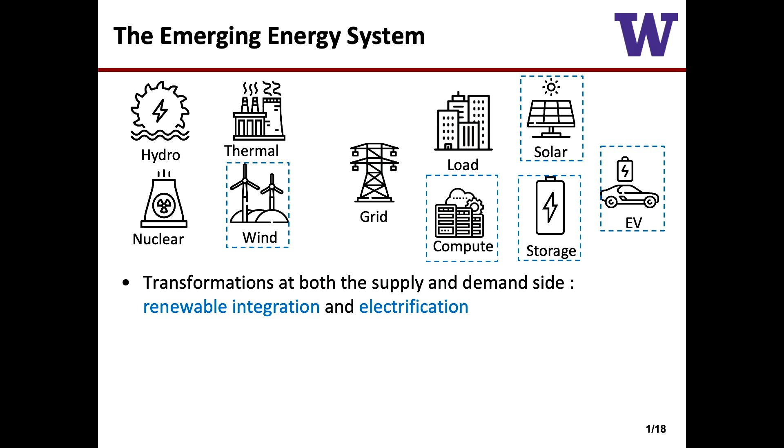So this will be a more technical talk looking at the energy system and AI, how they influence each other. As was said, if you look at the power system, it's quite an interesting time in power systems. The system was relatively stable for 40 years. In the last 20 years, it suddenly started to change very fast. We're at a case where both the demand side and the supply side are changing. The supply is starting to be uncertain with renewables, and demand is really starting to pick up. So it's an interesting time to work in this area.

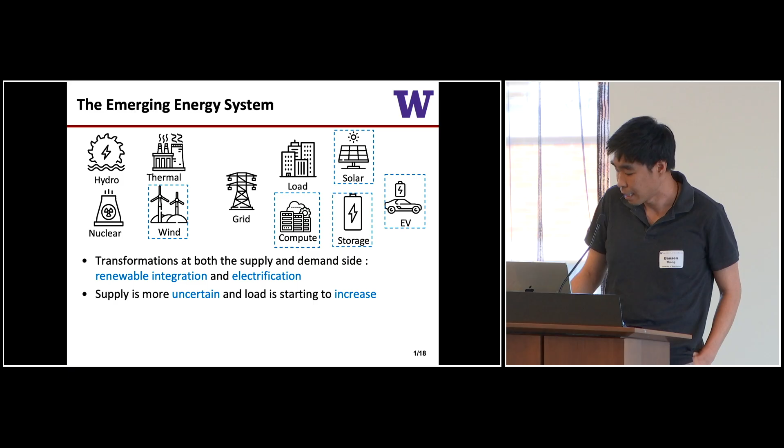If you look at the opportunities and challenges in the area, the power system is a system where building big things tends to be challenging. As we heard, we're getting better at building plants, but building things like transmission lines still takes years and years. But the things around the grid, from data to control to smaller generation, all of these things around the edge, we can do very fast, on the scale of months instead of decades or years. And with data, of course, comes a lot of excitement about using AI and ML. How do we use this data? What can we do with this?

And power system is a case where you don't get to try things out, right? You fail once, they'll never talk to you again. So you have to make sure of anything you do; you don't get to say, let me try this 10,000 times and I'll get better. You cannot fail. And now things are starting to interact. Three or four years ago it was, how do we use AI to improve the power system? Now AI is one thing power system engineers think a lot about, just to power the AI that's coming in.

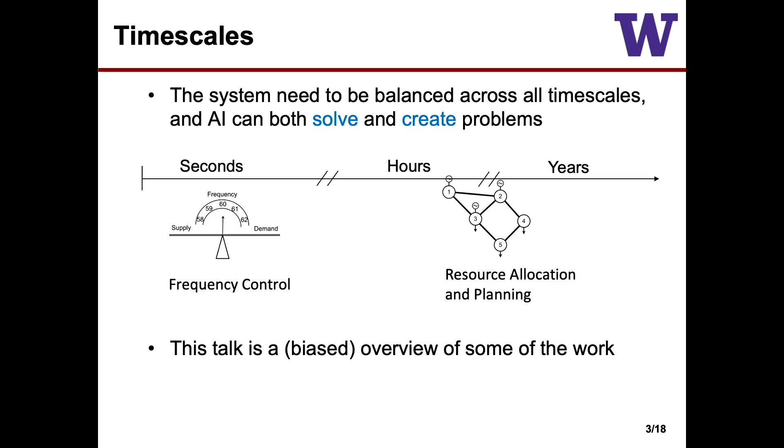One thing to remember for a power system is we have to balance the system at all time scales. Supply has to equal demand every second, every minute, every hour, every day, every year, every decade, and so on. And AI does help us solve some hard problems and also creates challenges along all those time scales. So I'll give you 2 examples, one at a very fast time scale and one at a much longer time scale, of how AI can help us solve some very hard open problems and what new challenges it creates for us.

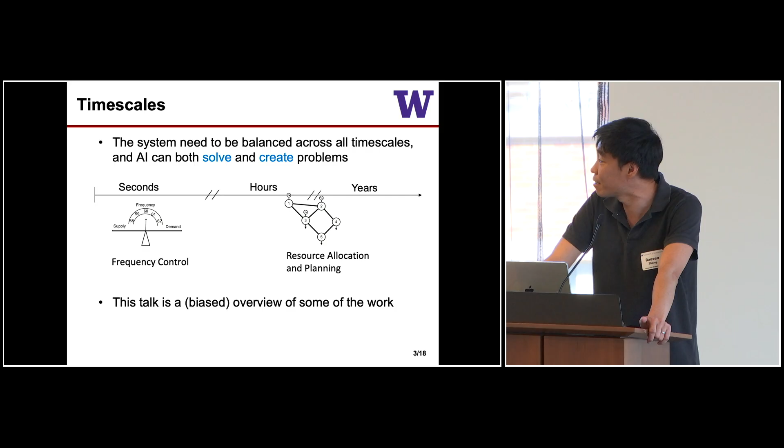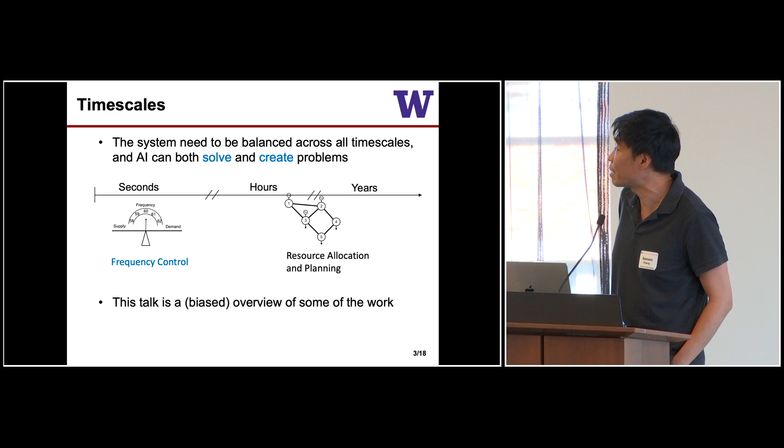This is an admittedly very biased overview. There's a lot more going on than what I'm presenting; these are just a couple of examples of things we have done. So let's look first at the fast time scale, at frequency control. Think about the power grid as a very large network system; it's thought of as the most complicated engineering system ever built. And the question is, why do lights stay on? It's a surprisingly non-trivial thing to answer.

Because disturbances in the system happen all the time. You can flip a switch, plug something into the outlet, turn off a light, and so on. You don't tell the generator, I'm going to use more energy. There's no explicit communication. How does the generator know? I'm a hydro generator 1,000 miles away; how do I know what's going on? Yet power stays on most of the time. Things are balanced. This happens by a mechanism called frequency control. I want to explain this a little, then tell you how renewables are changing this and what AI can do to help us.

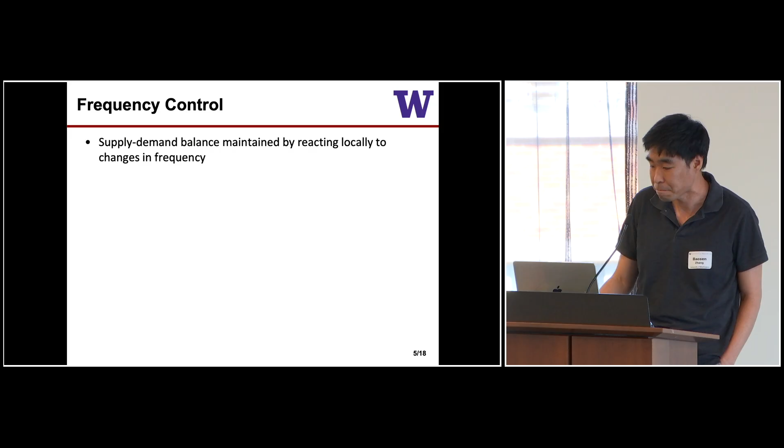So supply and demand is basically maintained by just reacting locally to a thing called frequency. If your supply and demand is balanced, in the US our grid runs at 60 hertz. It's a constant frequency. If you plug something in, demand goes up, and then frequency goes down. So you're borrowing this rotation inertia in the big generators. You're borrowing this power out of it, so they spin a little bit slower, and then this power goes for

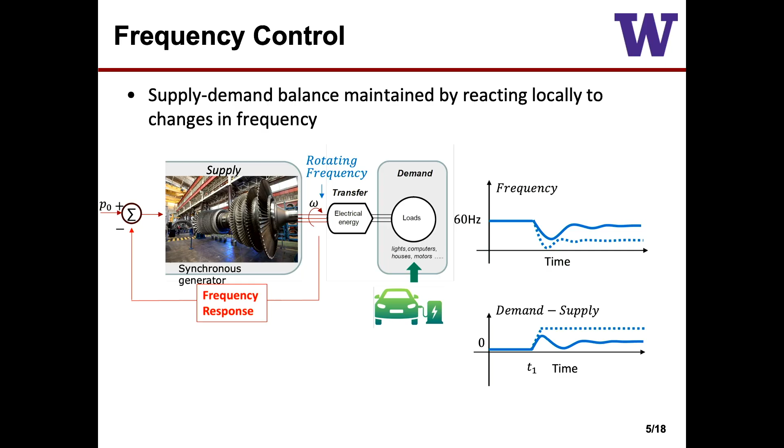the demand. Then your generator observes this, and you're supposed to do feedback control, and you can recover your frequency. And this number tells us basically the health of the grid, a single metric that tells the balance. And if you have big generators, they sort of do this linear response. This is determined by the physics of machines. They just rotate this way.

The question now comes, what if I replace all these big synchronous generators with power electronics? Most renewables connect to the grid through power electronics. These are digitally switched circuits. They have no physically moving part at all. So they don't need to do this response. They have no natural response to this.

And then somebody mentioned FERC. What FERC does is tell you, well, you have to do something, otherwise the grid falls apart. FERC doesn't tell you what to do. It just says, I require you to do things so the grid is stable. So what should you do? Well, one thing you can do is try to act like a generator. That turns out to be not a very good strategy.

If you think about it, a big synchronous generator is the size of this room, and your inverters are this big. So if you try to be a synchronous generator, you're not a very good synchronous generator. So you should do something else. But this is actually a very hard technical question. We don't know what to do. We don't know how to solve this problem.

So the obvious answer now is, let's use AI for this. I don't know what to do, right? I'm just putting in a neural network, and hopefully it does something reasonable for me. And this is not very hard to train. Your goal is basically to optimize how large the oscillations are in the grid. You put this into a training environment and look at how to minimize this thing. It takes you about a few hours to code this up.

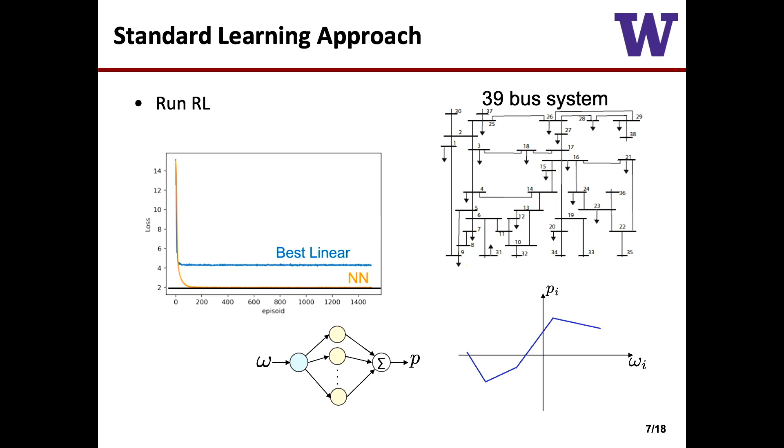The trouble comes if you do this directly and put it into a grid. Let's say you actually put it in and simulate it, what happens? It will actually blow up your grid. Training looks very nice, but in practice you will have an unstable grid. So the challenge of using AI for energy system control especially is you need to make sure there are constraints you include when you use these kinds of tools. There's a stability constraint, not just cost. The grid should be stable all the time.

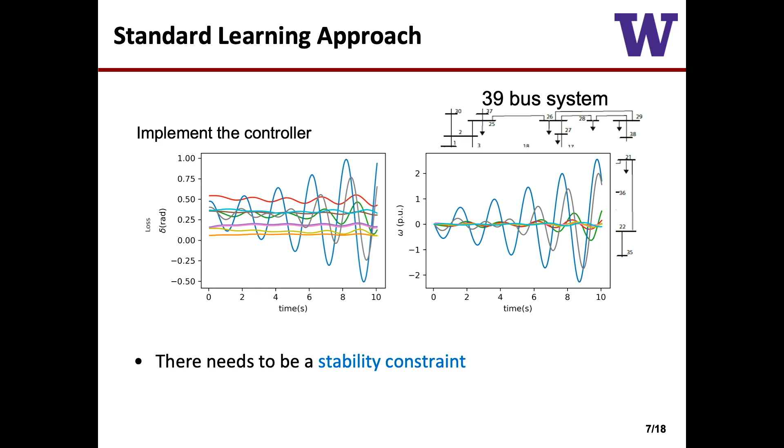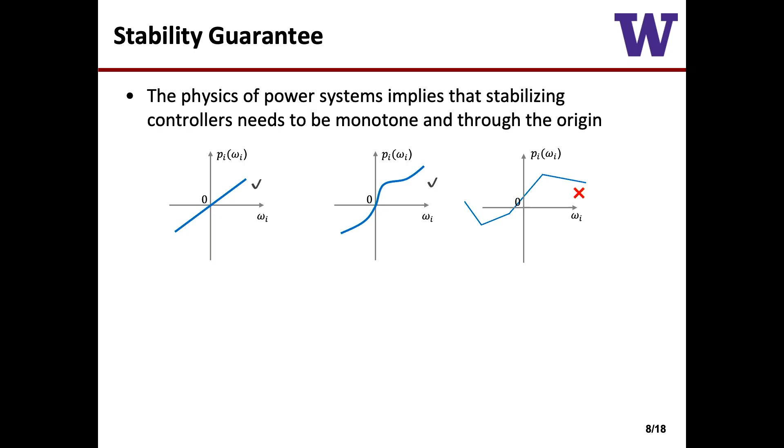I'm not going to tell you how we do this. The upshot is that we know a lot about the physics of power systems. If you use that for AI-based controllers, we can give you criteria for what they should look like. Basically, it should be an increasing function through the origin, and we can constrain the neural network to be this class. Then we can learn the right type of controllers.

It actually gives us quite optimal controllers, like the one in the middle; there's no way humans could have designed that. But we can guarantee it's actually strictly better for the grid when we use it.

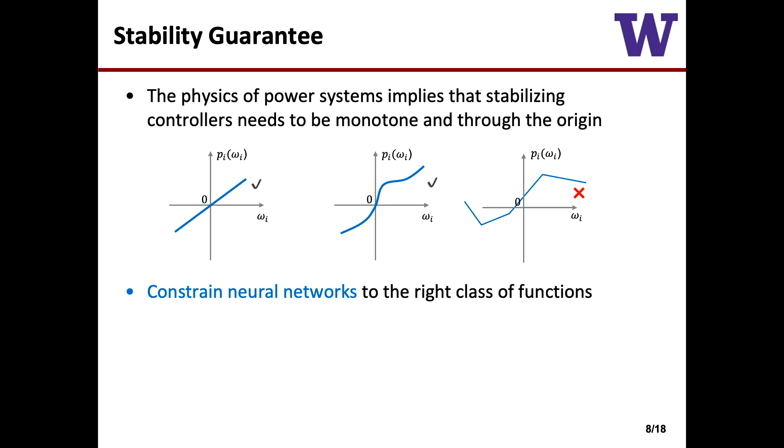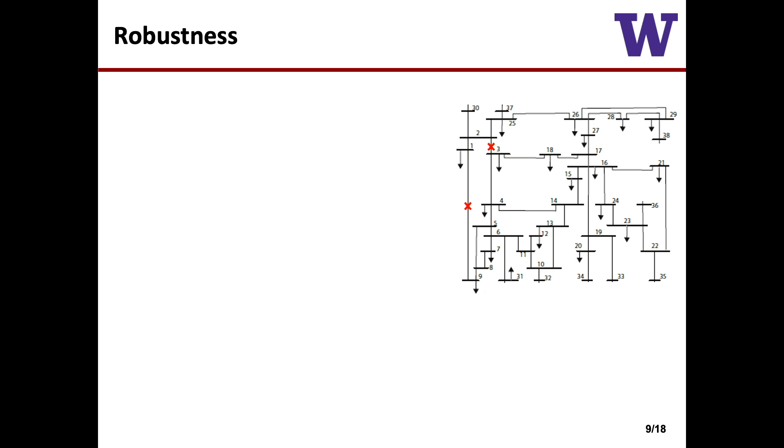And when you work on this sort of physical system using AI, it actually makes the problem a bit easier to deal with. So a lot of times when you do machine learning, you're worried: what if the problem or the system or data you train on is different than the data you see actually in practice, right? So maybe I train it on this kind of network. In practice, these two lines go out. And this happens all the time. Lines go out all the time in power systems. What happens? Do they work?

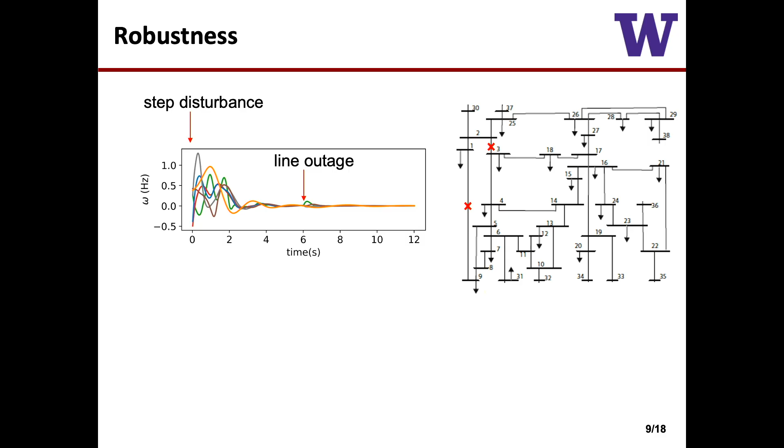Turns out yes, right? So this is showing you that if I have a disturbance, if I have a line outage, whatever controller you learn is actually quite good. And this comes from the fact that because we're working specifically with the physics of power flow, the power system, we don't need to worry about these kinds of things. We can sort of guarantee stability for all situations. And then you can retrain the controller if you want to.

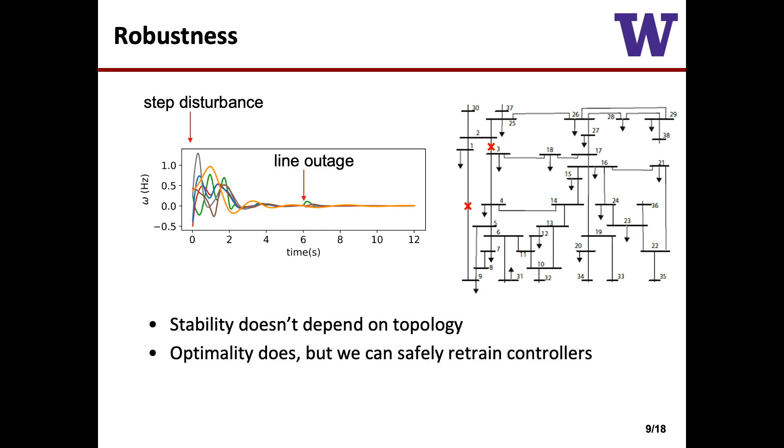Right? So this is a very nice combination of AI solving some sort of open question that we had in power. And then because we're working in this very specific system, we can overcome some of the challenges when you apply AI to other problems. This is one very good use case of AI.

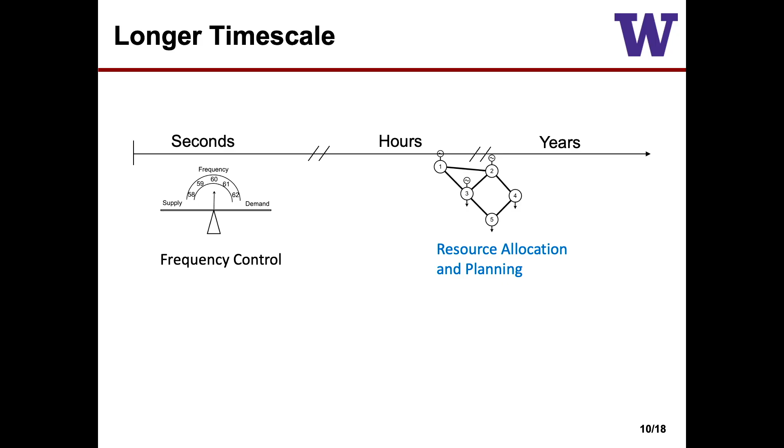And next, I want to switch to a case where we look at a longer time scale. This is sort of a resource allocation and planning problem, and it often takes the form of what's called the optimal power flow problem. So you can think of this as a problem where I have some loads, I have some generators. How much should each generator generate to meet the load? I want to minimize cost, subject to a bunch of engineering constraints. So voltage cannot be too low, flow along a line cannot be too large, and so on. So I have a bunch of constraints.

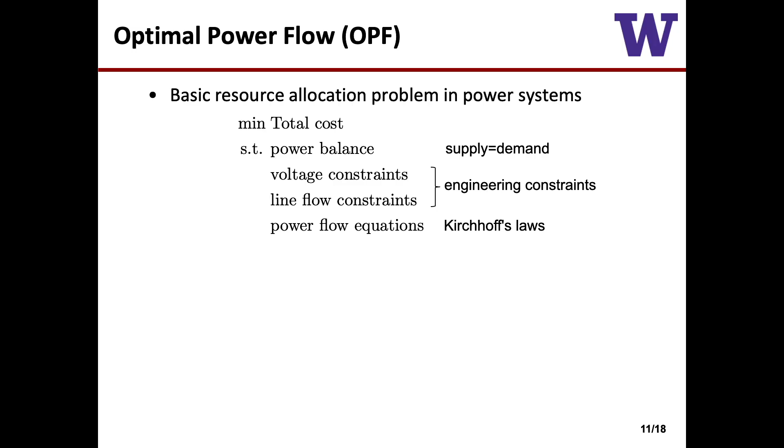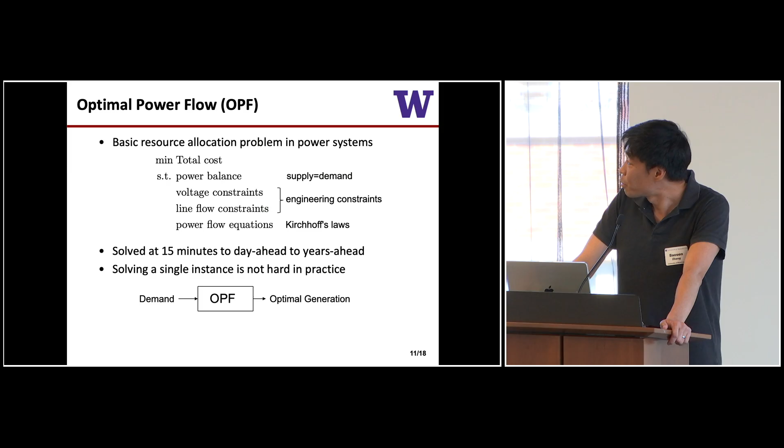So this is solved all the time. This is solved every 15 minutes, every hour, every day. We'll keep solving this. And solving a single problem is not very hard in practice. We have solvers that have existed for 40 years to do this. And if you look at this question, naturally you want to think about, well, I don't really know what my load will be. So how do I handle some uncertainties in this load or generation? Before, it wasn't really a problem. You have very small error in your forecast anyways. You just solve for the average, and you eat a little bit of the error. You have some reserve for that.

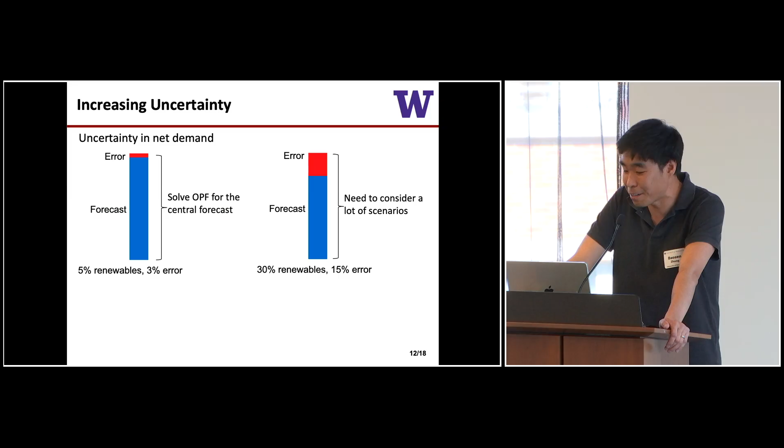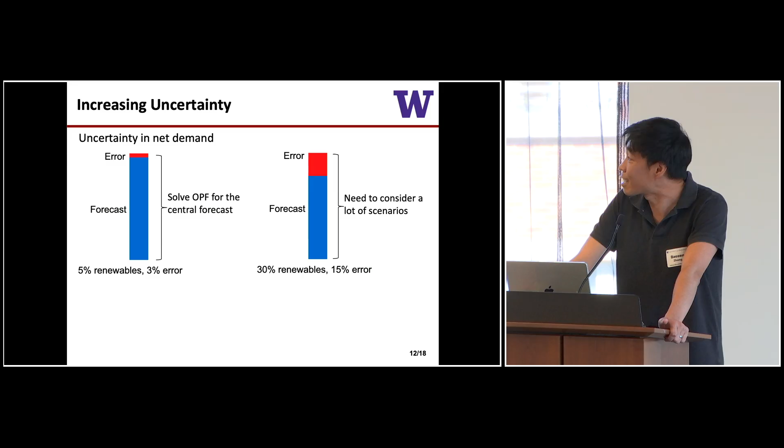If you have, say, 30% renewables, it's really hard to forecast wind day ahead. It's really hard to forecast solar. You just have higher uncertainty. Then you cannot just solve for the expected forecast. You really have to take all these possible scenarios into account. So instead of solving one problem every 15 minutes or so, it's now very hard to solve, let's say, 10,000 problems every 15 minutes. I need to look through all the scenarios, what could possibly happen in the future.

Now again, you can look at this problem as a very nice machine learning problem, because you can think of it as: I give you some demand, you tell me what the generation is. It's some box that is a solver, but you don't need to care about that. So I can replace that, say, by a neural network, and say, OK, just tell me what the generation is. I don't want to use a solver.

The challenge here is, well, in power systems we have hard constraints. There are constraints you have to meet. So an approximately OK solution isn't very useful. You really want a feasible solution. That is hard to do. It's hard to guarantee that your solutions are feasible. We have made partial progress here. So for a simpler linear version of the problem, we can guarantee feasibility.

For a sort of nonlinear problem, this is extremely active research. Some folks from Microsoft are here, but Microsoft, for example, is trying to develop a foundational model for the grid, essentially to try to solve this problem very quickly. And even the approximately good solutions are useful for planning.

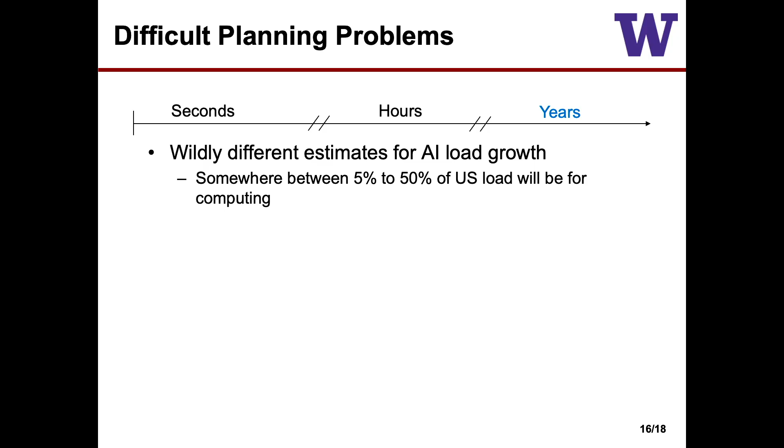Next, let's look at longer planning, in years. There are very different estimates for AI load growth. I have seen numbers going from 5% to 50% of all US electricity used for computing. Probably somewhere in the middle, but I'm not sure exactly what the number will be. So there are big gaps. If you're a system planner, which number do you choose? I have to plan my system ahead of the time the load comes in. If there's an order of magnitude difference, what number do I pick?

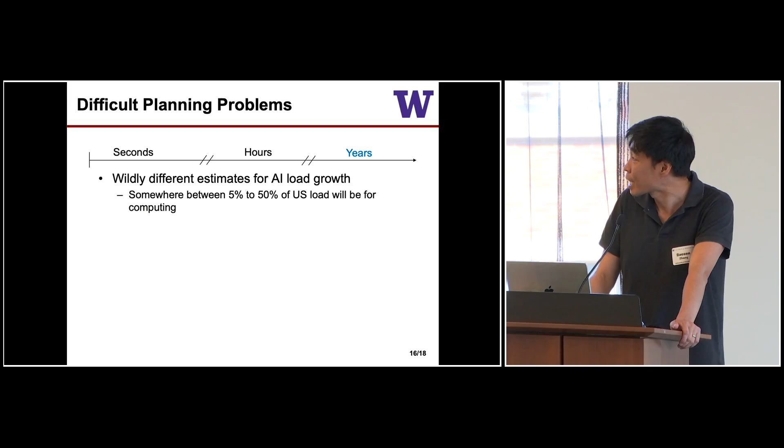On one hand, if you bet wrong and don't build enough capacity for AI, you have no power. If you build too much capacity, you spend $2 billion on something you'll never use. So there are consequences to erring each way. And the thing to remember is that it really matters when and where you use power. We spend most of our time worrying about that last little 2% of power. If you can spread out your power usage, it's not a huge deal. But if everything is concentrated in a single second, then it's a huge deal.

So we know that data centers have a lot of flexibility. They can shift their load around. The question is, it's hard to put a number on it. To integrate that with power system planning, I need a number for how much load it can move around. It has been difficult to put a number there.

So to conclude, there are a lot of changes in this grid, and AI is coming in. AI does help us solve a lot of problems and creates a lot of challenges, but I don't think these are intractable. I don't think these are problems you cannot solve. I think we're just beginning to understand this loop, and I'll conclude here.